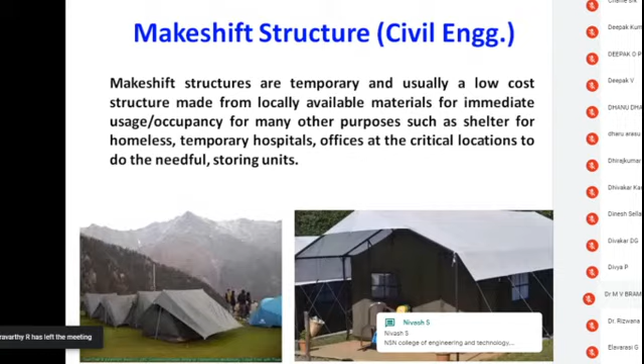So a makeshift structure is nothing but a small, economically viable structure, and it can be installed wherever you want in a very immediate manner. And it's not a laborious one, so there is no need for high technical expertise to implement those technologies. Each and every makeshift structure has its own sequence of opening, sequence of folding, sequence of collapse, etc.

Okay, so we have to follow those instructions to erect the makeshift structures wherever we need. Basically, in this image, you can see there are two structures existing. The first one is a normal tent. The second one is also a normal tent.

But the difference is the second one is engineered, where we have steel frames, and then it is entirely covered using any sheets. If you want to have a tarpaulin, you can use it, or if you want to use some plastic sheet or PVC coated sheet, you can use anything. It's up to our feasibility and availability.

In the makeshift structure, we have to ensure one thing, that the material which we are going to use to make the structure should be available locally. The reason is, suppose I'm residing in the Himalayan area, if I want to make a makeshift structure at a particular point of hill stations, the material should be easily transportable. That's very, very important.

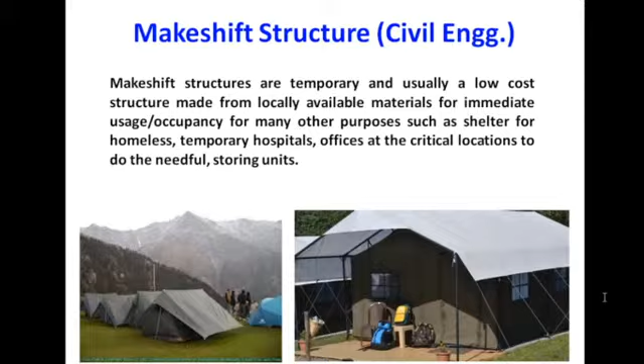So it should be transportable, light in weight, durable, and available locally, so that I can procure it in a large amount instead of importing from some other districts or states, because now crossing a district border itself is very difficult. In such circumstances, bringing material from other districts is very difficult to procure. So instead, if I have materials in my own district and my own town, it will be very easy for us to install things.

So makeshift means I am able to fabricate a structure at a particular point. After its requirement is fulfilled, I can move it to some other place or to my storing unit. Whenever it's required, I can take it back and install it at the place where it is exactly required. That's the exact meaning of makeshift structures.

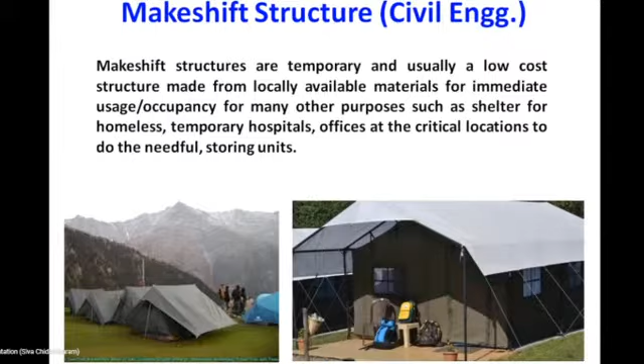Prefabricated structures are one of its kind, I can say. For example, in 1999 in Turkey there was an earthquake, and many structures completely collapsed, including prefabricated structures, and we lost a lot of lives. Post-earthquake studies say a lot of industrial structures constructed using precast and prefabricated units failed. But the very big thing is, immediately after the earthquake, they made temporary shelters using prefabricated units.

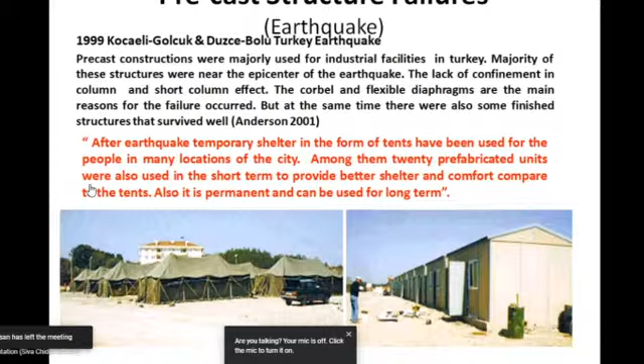So up to that time span, say 1 year or 2 years, I have to accommodate those people who lived in wonderful structures. Due to earthquakes, they have lost their buildings and become homeless. Accommodating them in a tent for 10 days, 2 weeks or a month is fine. But for 1 or 2 years, I need a structure which is not permanent but semi-permanent, and gives them perfect comfort. So the second image shows prefabricated structures, even though the earthquake showed prefabricated structures failed.

Some of them will survive also. But again, we have to go for these kinds of options because we don't have alternate options to make a structure in the fastest way.

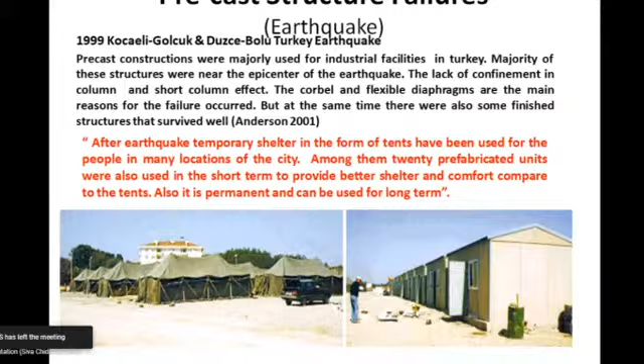So the importance of a makeshift structure is it should be lightweight, easy to assemble, transportable, economical, and durable for multiple purposes, because now we have very critical situations. We are going to install a lot of structures, and after certain months, if our problem is solved, we are not going to use them. So they will be stored in a storage unit. Whenever required, we will take the structures out and install them.

The material I use to fabricate these structures should be durable for multiple uses.

Next is feasible connection mechanism. In makeshift structures, connections play an important role in connecting two elements and transferring force between them. These connection mechanisms should be feasible, otherwise if anything happens while transporting or at the time of installation, if I face difficulty installing the structure, I have to immediately replace the impaired point, or repair it using locally available material. So mechanisms should be easily available and feasible. That's another point, and erection should not take too much time.

If my erection takes too much time, I can't make the structure rapidly and can't accommodate people in time. People means not only adults, but children or elderly persons. We can't keep them under hot sun, humid climate, or winter climate. So we have to accommodate them rapidly, no time delay. My fabrication and erection methodology should be very easy so it saves a lot of time.

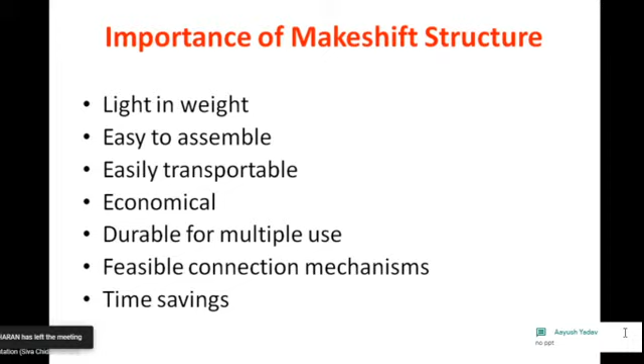So let me start with a small idea: a temporary shelter using PVC pipes and joints. We know PVC pipes don't require engineered persons to erect this kind of structure. PVC pipes are a very durable material, especially the electrical PVC pipes. We also have PVC pipes for pipelines, especially underwater pipelines, which is very tough material. So you can see tough pipes can be used for fabricating a structure.

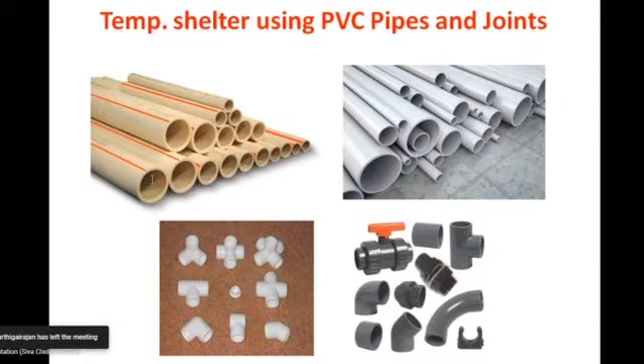Now, I need a temporary structure to accommodate, for example, 10 to 15 persons. So immediately I can make a shelter using PVC pipes, which are generally available everywhere, along with connecting elbows. Just connect them to make a shell, then cover it using any sheets or tarpaulin sheets. If you're running out of sheets, you can use normal fabrics, or normal sheets if it's not rainy season.

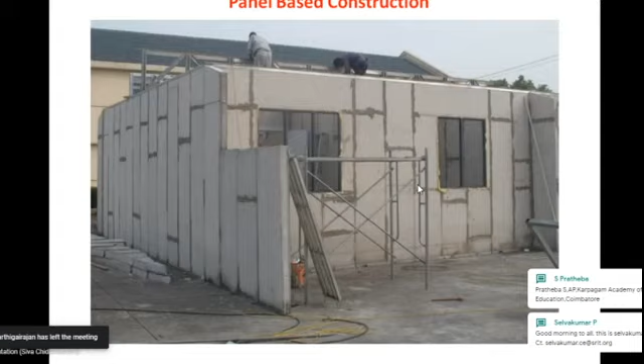These kind of wall panels are easily available in many locations, and they come with connecting mechanisms. It's not a simple wall panel, it's a wall panel having many connection mechanisms. Among them, one is very famous.

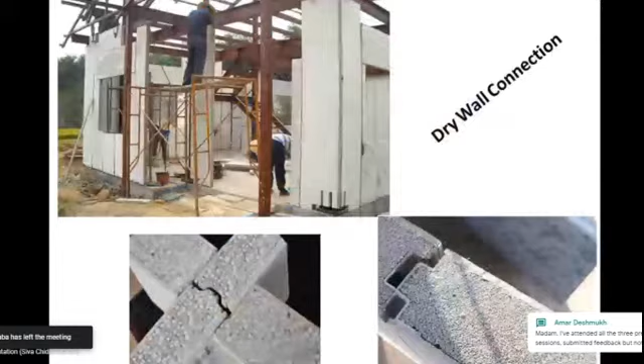Let me show this one, it's called tongue and groove. Here you have to insert a groove like this. After fixing it, you can grout it completely using grouting materials made of polymer based, epoxy based, or cement based materials. Now after grouting it, it will become like this.

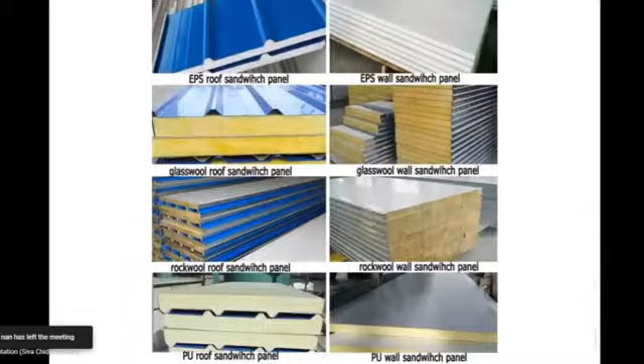If you want to introduce a window, you can introduce it. If you want to introduce a door, you can introduce it. So it is very easy to install. In a daytime you can install the structure. To get a completed structure we may need a week maximum, 2-3 days maybe we can easily complete the entire structure.

And these wall panels can not only be used for a single story, they can be used for multi-story buildings also. If you have an external moment resistance frame mechanism, then you can use these kind of wall panels for multi-storied structures also. Multi-storied structure - how can it be a temporary structure? There will be a question.

So just imagine we have steel sections in and around the disaster-prone zone. I can bring the steel frames, I can design and make a G+1 or G+2, and immediately it can be erected using welding and bolting technologies, so it is quite rapid. In such a circumstance, instead of going for conventional material for infill, I can use these kind of materials.

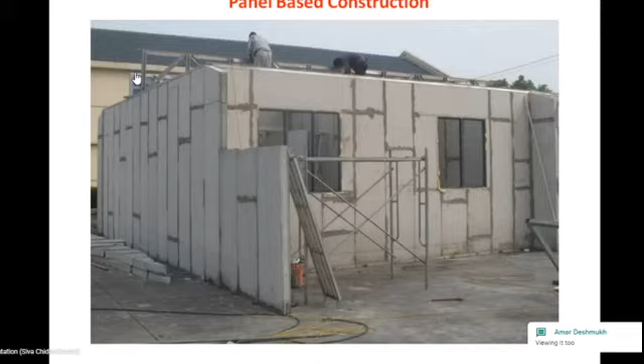Now you can see this is one of the wonderful structures made from lightweight panel-based construction. Lightweight panel-based means it's similar to the panel I discussed in the former slide. This is made from polyurethane foam as a core material. The core material will always have polyurethane foam, EPS, or foam concrete, anything.

It's less dense, so it will be easy to transport. Because if I'm using a truck or lorry, I can transport the material for the entire building. If I can transport material for the entire building construction using a single truck, that will save a lot of time for me, and I can make it very fast.

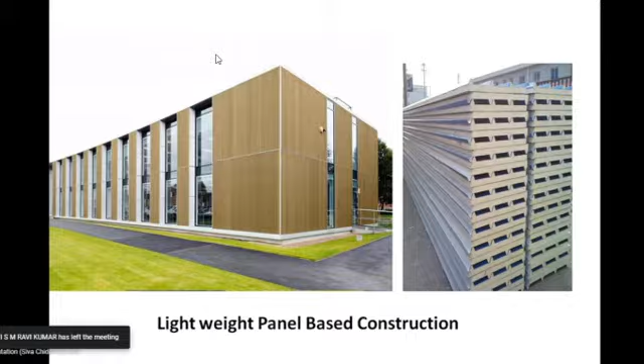Now you can see this is a different type of wall panel, made using EPS, PU foams, glass wool, and foamed concrete. Externally and internally, it will be covered with durable materials such as corrugated sheets and plywood boards, cement plaster boards, or fiber boards, etc.

Reason for corrugated means corrugation will give additional stiffness to your wall panel instead of a plain sheet. So generally, when they use corrugated sheets, the external surface will have corrugated portions and the internal surface will be smooth, because internally inside the building we don't want to see corrugated portions as it doesn't give much aesthetic value. That's why they use plain surface inside the panel structures, whereas the external portions have corrugation, which gives a wonderful amount of stiffness.

Now you can see this is a kind of framed structure they are making, and they are using infills as wall panel materials. This way construction happens in a very rapid manner. Otherwise it would take too much time if we use locally available conventional materials like brick, cement, concrete, etc.

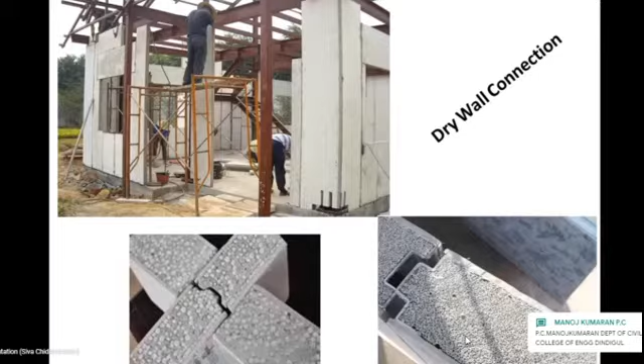Next is collapsible structures. Collapsible means we are trying to save space - that's our main purpose. For example, in this image I've shown two chairs. This is called a foldable chair, which means after the need is complete, we can fold the chair and store it somewhere, so it won't take up large space. If we are running out of space in our house, we use this kind of foldable chair so that after its purpose is complete, we can fold it and keep it somewhere to utilize the existing space.

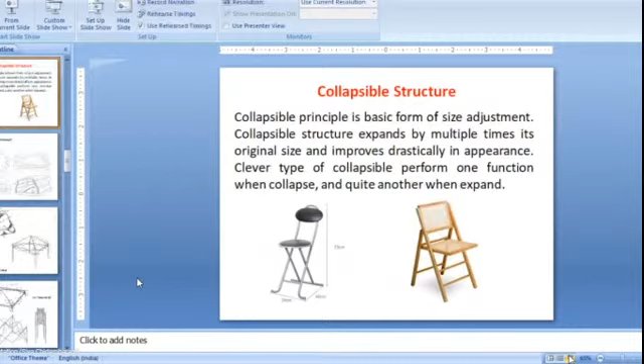The same phenomena we are going to use to make structures out of it, so that I can utilize many of this kind of ideas to make structures.

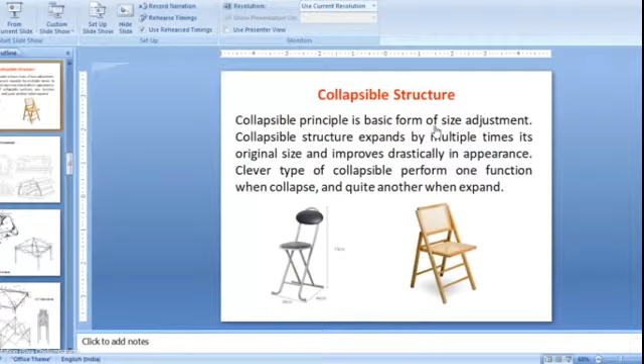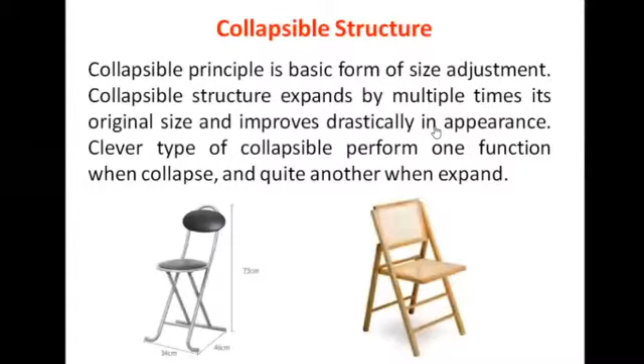Now there are many types of collapsible structures we have. Many inventions have been made to create collapsible structures using different types of materials. That's why before entering into a temporary shelter, we should know about different types of materials available at sites. So let us go through some collapsible mechanisms.

Now you can see here, the first image shows the elevation of a structure. But wherever you see some cuts, they have used hinges. If you are seeing me, I'm showing you some hinge. These kinds of hinges can be used to make a structure foldable - simple hinges, and these hinges are generally available everywhere.

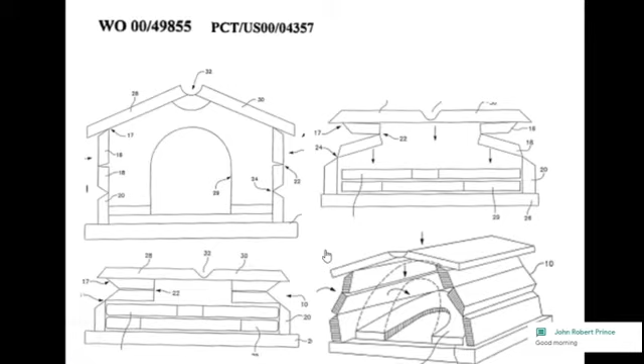So in the first image they have the elevation, and in the second image they have made a lot of cuts in the structure and used hinges at the cut points, so it can fold like this. The third image shows the structure completely folded. So a full-scale structure becomes very small, and it can be erected wherever you want. It is easily transportable because these structures are light in weight, and easily erectable, so anybody can do the erection.

If you want to transport material, it is very difficult to transport even some steel frames. But if I have small structures like this, we can easily transport them to a hilly region so that people can be accommodated in the structures.

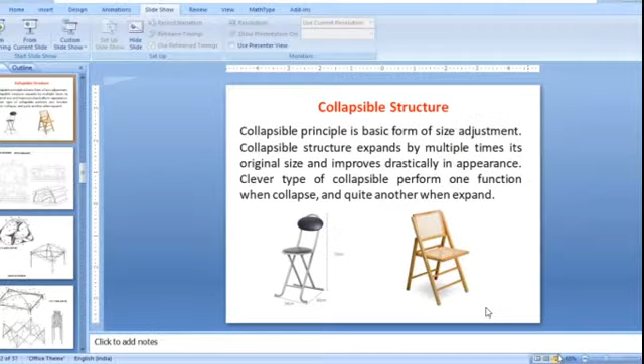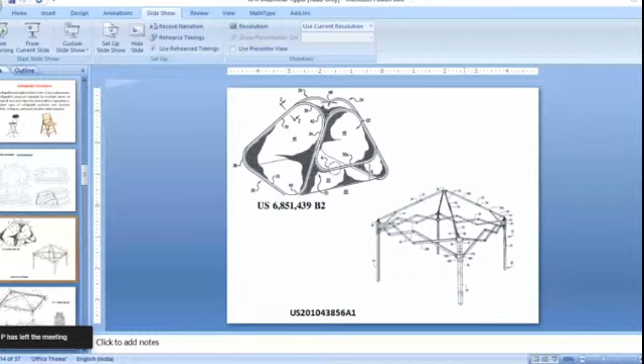If I collapse it, it becomes like this. If I open it, it becomes a square. If I further open it, I am able to elongate the length. And if I collapse it, it can extend in the vertical direction. So in vertical as well as horizontal direction, I am able to collapse it like this. This kind of mechanism is not new. It is a very old mechanism, and it can be effectively used in our civil structures to make them collapsible. So this is how they have made collapsible structures.

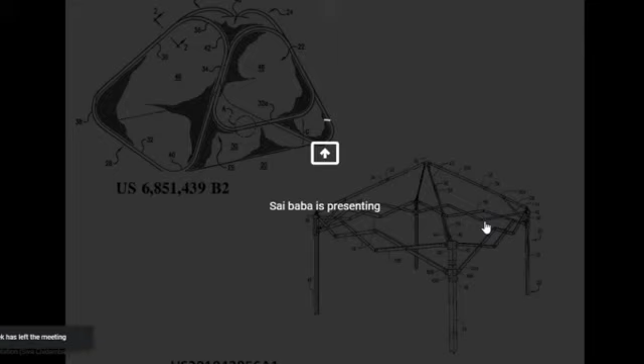So this kind of structure can be collapsed and converted. It looks like a very big structure, but if you collapse it, it becomes a 1 feet by 1 feet structure, so it can be easily transported. Generally, collapsible structures deal with only frame elements so they are easily transportable. They are not bothering about external covering. Covering can use any tarpaulin sheets, PVC sheets or plastic sheets, whatever is available. Those sheets also can be folded and transported in large quantity. That's the primary thing.

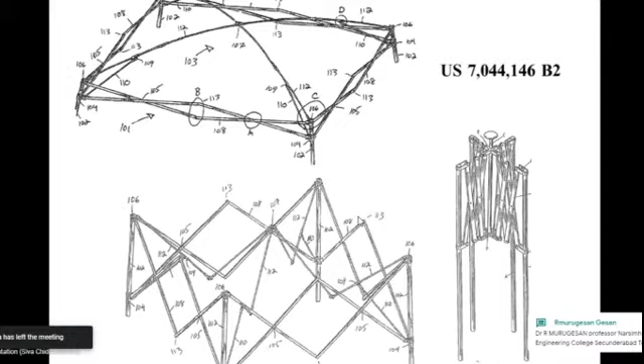So now this is a similar kind of thing I can show you. The first image shows the open structure, the second image shows how they are unfolding it, and the third one shows how after completely folding, the structure becomes a small element. So now it can be transported everywhere. With these transportable structures, in a single truck you can accommodate, say, 100 small units. If you can transport at least 50 units to a particular place using a single truck, it is a huge time saving and a huge cost saving for us. So we can provide immediate shelter to the people or to the needy.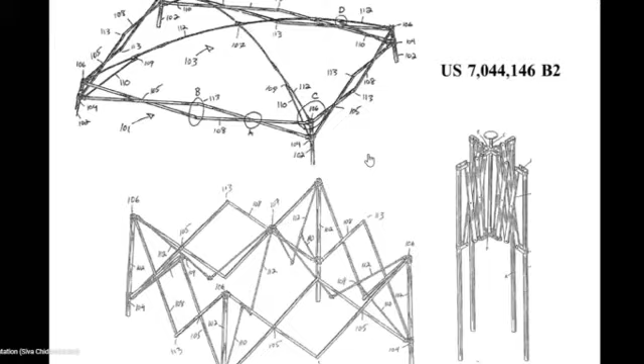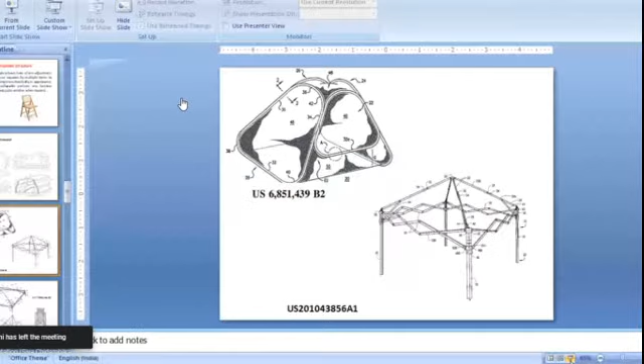So now this is one very famous invention. They are using shipment containers to make structures out of them. Before going into the presentation, I would like to show you some videos. These videos are already available on YouTube, so you can see those things. Let me show you.

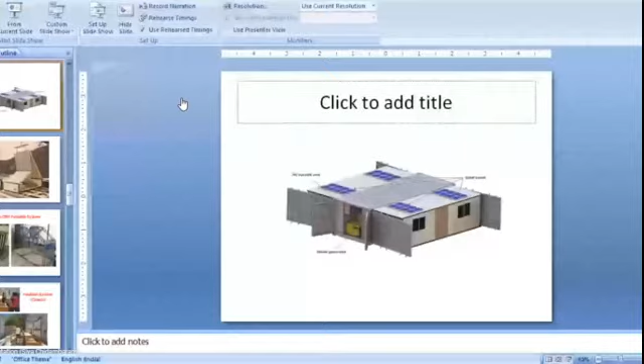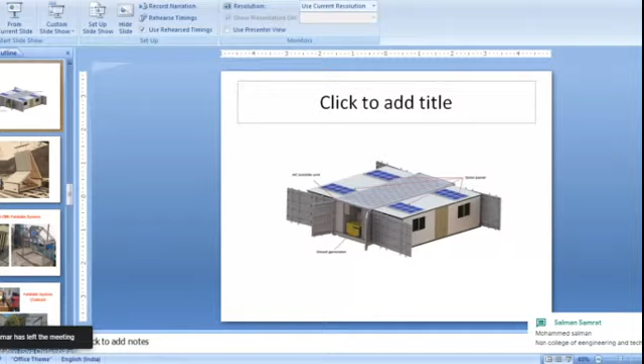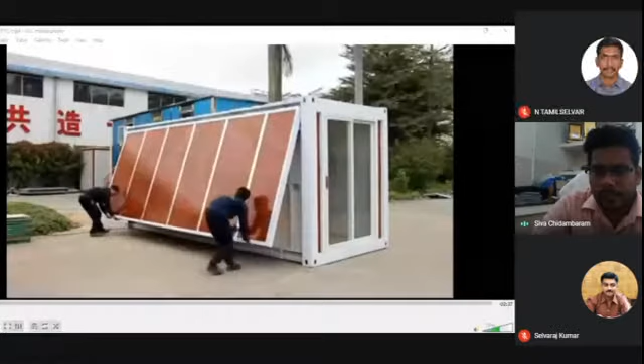Sir, I'm sorry to disturb you. This is Dr. Kanmani. There are actually some disturbances coming from your side, sir. Somebody is, I think, chatting. From my side? Yes, sir. All other participants are on mute. Okay, I will try to rectify that. Your audio is not clear because of that. Thank you, sir. Okay, sure. Can you see this video now? No, sir. Yeah, now it's showing. Yes, sir, it is visible. Okay.

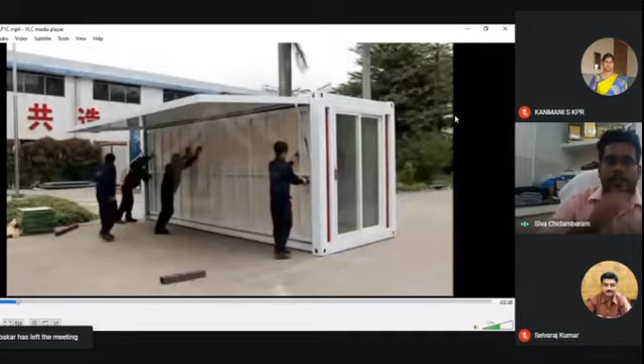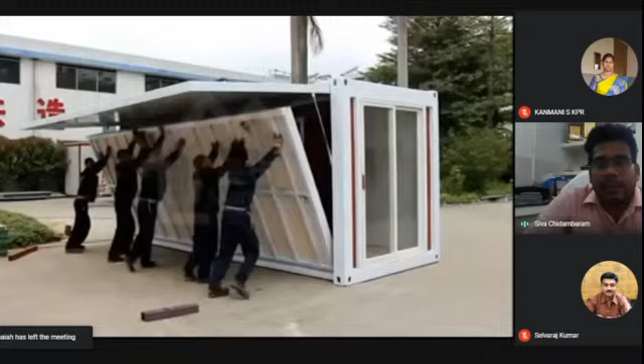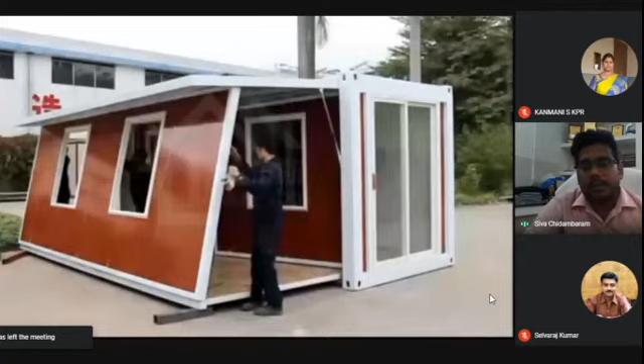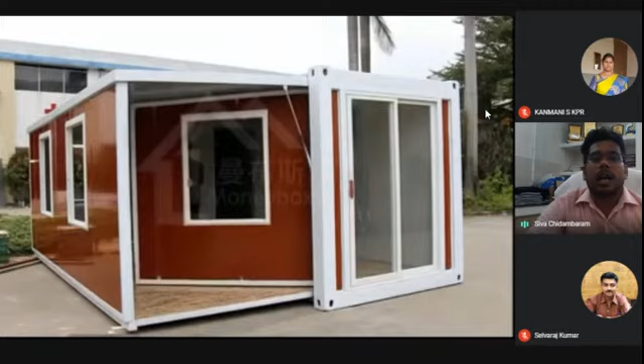So the main container structure is the main unit that will take all the forces. The remaining foldable and unfoldable units are connected with the main container structure. The container is the main solid unit, and they have installed a lot of extendable units made from lightweight materials. Now you can see how they are installing. They don't need any frames, cranes, equipment or instruments to install these structures. It is very easy to install. The main body is made from a container, the extendable units are attached to it, and it can be easily erected.

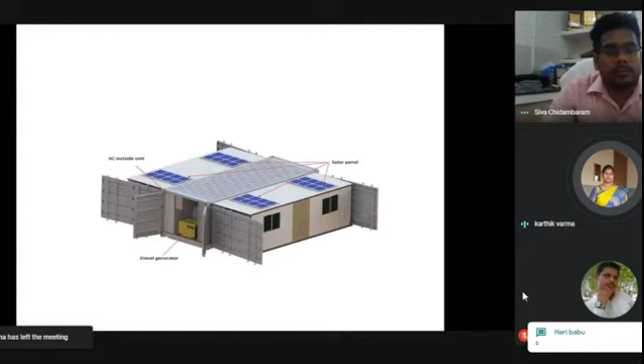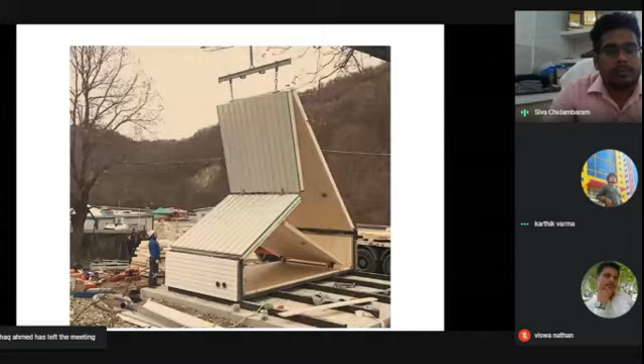Am I audible? Can you hear me? Yes, sir. Yes, sir. Okay.

So those kind of container structures, but these container structures are very stable and will give you wonderful comfort. And you should know a lot of folding mechanisms. Folding mechanism is a must. Foldable steps, foldable beds. You can see a lot of folding mechanisms in internet sources, how we have to utilize the existing space, and how it can be used in a wide way.

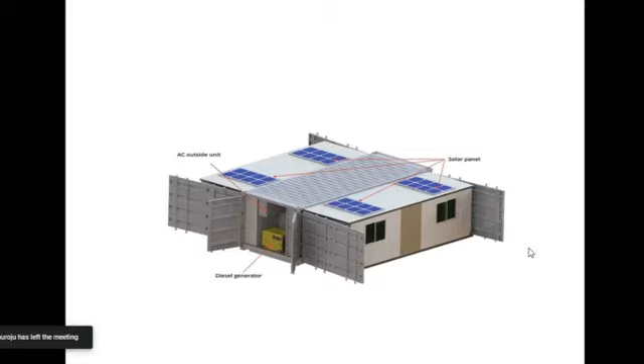For example, a small container can be extendable to a large space building. These kinds of buildings can be used for hospital purposes, and they give you wonderful comfort, in which you can use an air conditioner, whatever you want. This is like your normal house, but it is lightweight. The main central body is made from a container, an expired shipping container. Those containers can be remodeled like this and used for temporary shelters.

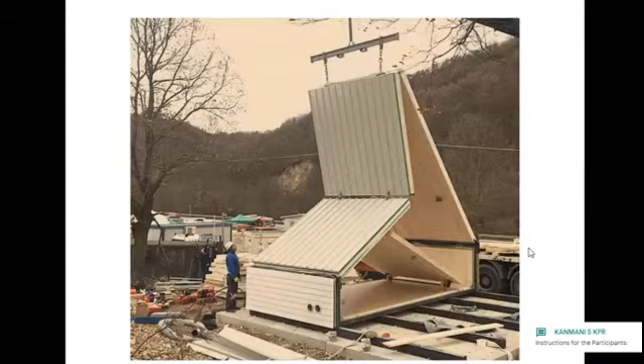Now, I have shown you some video of folding and unfolding. Folding and unfolding is a wonderful mechanism. You can fold and unfold any kind of building anywhere. The thing is, you need some additional instrumentation facilities like a crane or a jack system to fold and unfold the structures. If you have them, you can make n number of structures, because when you fold it, it becomes very small in shape.

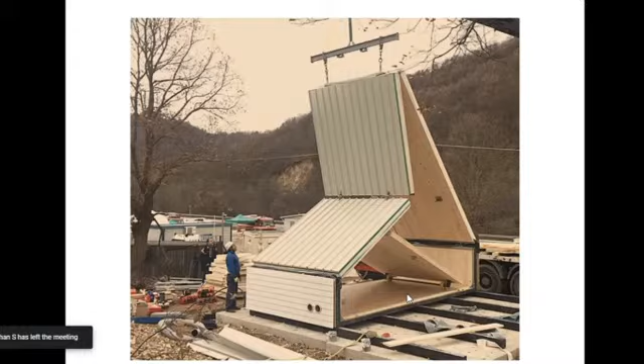I will show you another video later. When you open it, it becomes a house. So it is completely based on the need. If you want your structure with infill, you can make it. If you don't want infill, you can make only a shell structure and cover it with any locally existing material.

When you fold it, it becomes a 1.5 meter by 1.5 meter panel size, so it can be transported. In a single truck, you can transport nearly 20 to 40 huts, which are easily transportable and easily erectable. There is no need for a crane. You can simply open and install it.

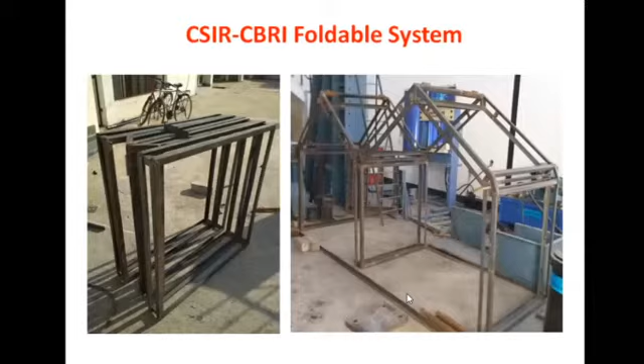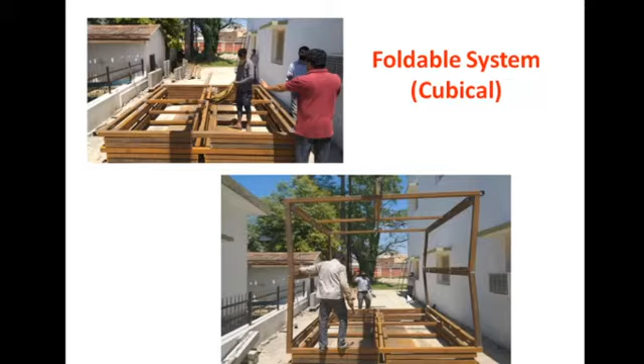Similarly, if you think you need a more comfortable building, you can make a structure like this. The first one is the folded unit, and when you unfold it, it becomes a cubical structure. These cubical structures can be filled with whatever infill you want. It can be locked using locking mechanisms, and then it becomes a very stable structure. So this is a small introduction to foldable and collapsible structures.

Now let us go into inflatable structures. Inflatable structures you would have seen in many cultural fests. Our children used to play in inflatable units, like toys made from huge air balloons, in which you can go and jump. Those structures used to be made like a castle or a ramp, and our children used to enjoy them. Those phenomena can be used to make inflatable structures.

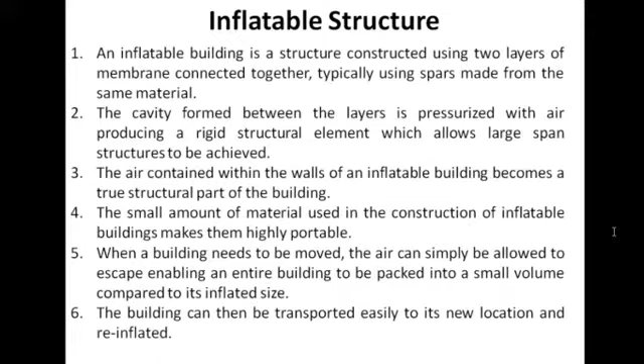An inflatable structure consists of two layers, an internal layer and an external layer, made from PVC-based or PVC-coated materials. When you remove the air, it can be folded into a small unit. If you fill air into the material, it becomes an inflatable structure like this.

So this is called an inflatable structure. There is no need for a flat surface anywhere. If you want to use it, you can use it. And the beauty is you can use the air conditioner, anything. So these kinds of inflatable units are very easy to transport. If you remove the air, it will become a very small unit.

It can be transported to any location where you can't bring huge, heavyweight materials, like a hilly area or a small island. If you want to transport huge material, it is very difficult to transport steel and wooden materials. Whereas these kinds of inflatable structures are transportable. This is a small introduction to inflatables.

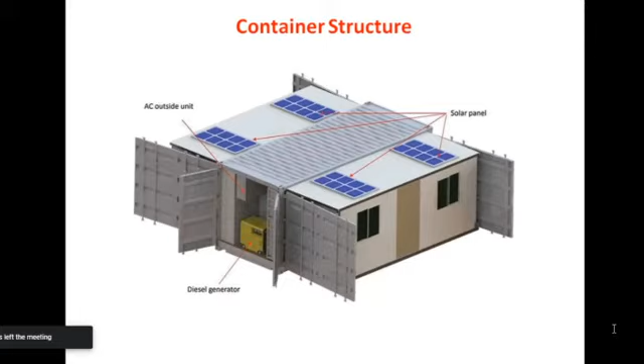Next is container structure. I have already discussed containers. Now, these kinds of containers can be used to make semi-permanent structures. You can see the same container has been used, and you can see a lot of structures made out of it. These are all semi-permanent structures because these are all expired containers. You can cut, you can make doors and windows. And the beauty of a container is it's a very stable, very rigid structure.

The external structure has been made using corrugated sheets. It's not like the normal corrugated sheets. It's a steel sheet in a corrugated form, so we can get a lot of stiffness out of it. So internally it will become very hot. So that is the primary problem we have. To address that particular issue, we have to use thermal comfort materials like PU foam or EPS foam.

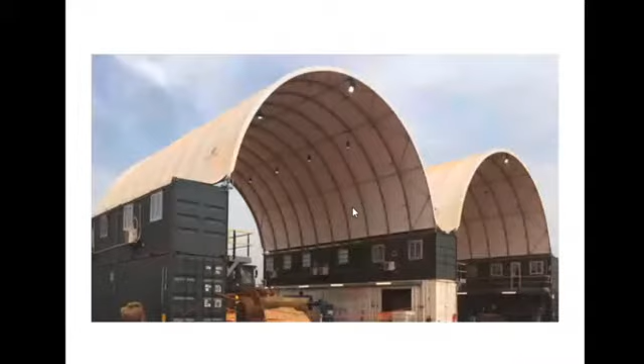So you can use those kinds of infill materials for the interior structure, for more thermal comfort, because it is made out of steel. So it will absorb a lot of heat and it will give you too much thermal discomfort. To avoid that, we have to use thermal comfort materials as infill materials. That's it. So these kinds of containers can be used to make a structure like this.

You can see here, the external roof frames have been made of aluminium. Again, it is a foldable unit. By using the containers, we can make these kinds of structures. Now we have trussless roofs also. That trussless roof will be made of corrugated sheets with a different type of corrugation. That will add certain stiffness, so we can eliminate the need for a truss. Those kinds of structures can be supported using our containers.

So now you can accommodate people in containers, as well as use this kind of covered area for storing any kind of units during any catastrophic problems, disasters, or pandemic situations.

Next one is German Hanger. German Hanger is a company name. They're using tents. It's a huge space tent. If you go to any international conference, or if your government is organizing an international science festival, you can see these kinds of structures, because we need a large area to showcase different types of inventions, scientific instruments and scientific experiments. We have to keep them in wonderful locations so that people can come and enjoy the experiments and the visually shown materials.

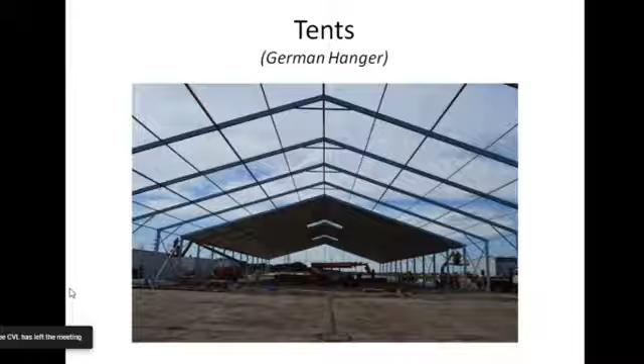And after completing this, we can use air conditioner. If you want, you can use air conditioner, and all these things can be used. Similar kind of tents we can make. So the bay width will be very large and the length will be very large. If you want to go for 10 meter, we can go for 10 meter width. 60 meter length also you can easily go for.

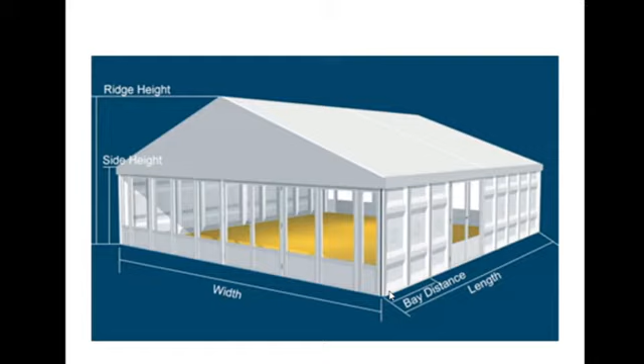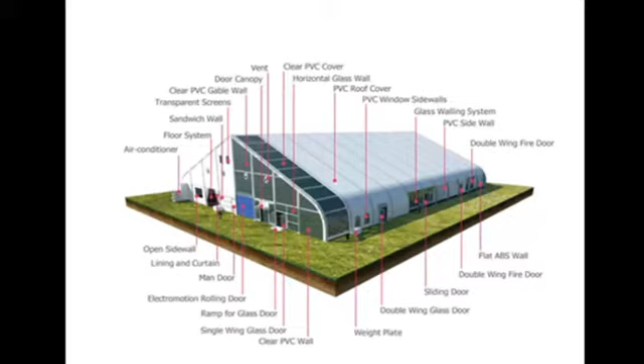Nowadays in many locations you can see this kind of tent kind of structures. This is like an industrial building, but it is a foldable unit, and after completing the main purpose, you can remove the skin materials, and the remaining frame materials can be folded. It can be transported in a truck. Simple. You can see a conference unit is completely made of this kind of tent structures, air conditioned.

Similar kind of tents, you can see the first image. It is like our grill doors, how we are opening and closing. Same pattern they are using. Now just imagine we have a grill door, and between two grills I have used some skins. The skin is foldable. If you want to really imagine this, currently we don't have it.

If you see an old bus from before the 1990s, the windows of old buses used to have folding units. These folding units will be locked at the topmost layer. Whenever rain comes, we can unfold it. The outer skin is made of some material which can resist the rain water, and internally they used to go for some steel plates. So it is foldable and it is durable also.

Same mechanism they can use. At the bottommost point they have a rail. The entire structure will be placed on the rail, and they will just pull the structure. After pulling the structure up to a certain distance, now your building is ready. Your temporary shelter is ready. This shelter can be used for any purposes as per your needs.

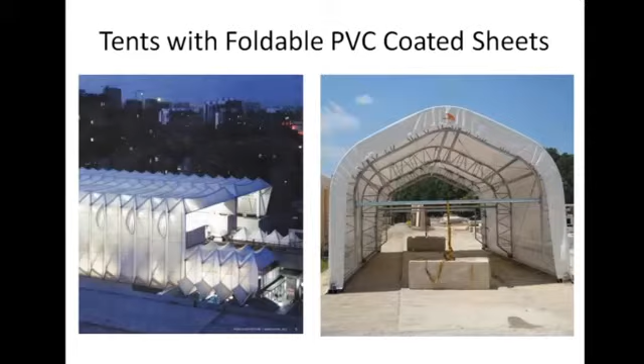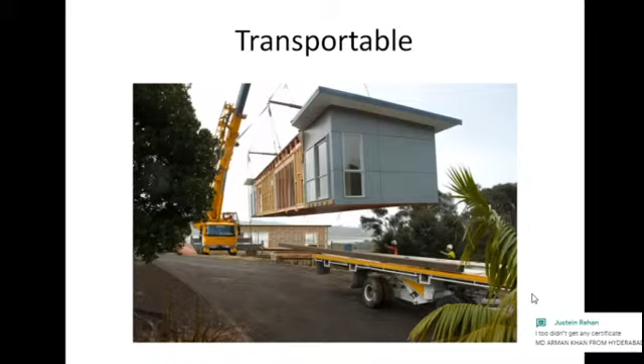Now, I have told you that these kinds of structures should be transportable. If you are making a structure using heavy weight, then we can't transport it. The material should be transportable, or otherwise the entire unit should be transportable using an available truck. So whenever you are thinking to do some research in this, always remember one thing: in India we have a limited size for a truck. Everything should be accommodatable within the truck, and accordingly we have to design and fabricate any units. So material should be lightweight.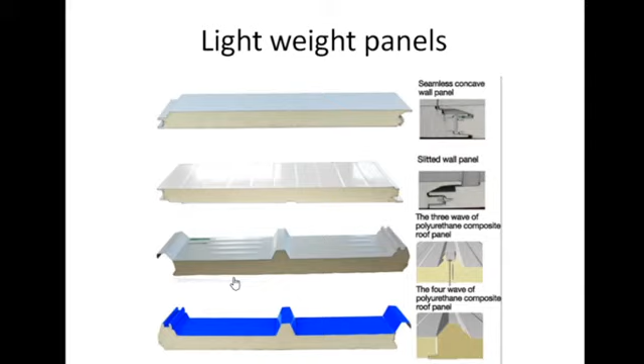You can see internally and externally they have a very rigid panel made from any materials. It will act as heat insulation. Internal materials are some thermal insulating materials made from foam, any materials which provide sound insulation and thermal insulation. So the external temperature and internal temperature may be different.

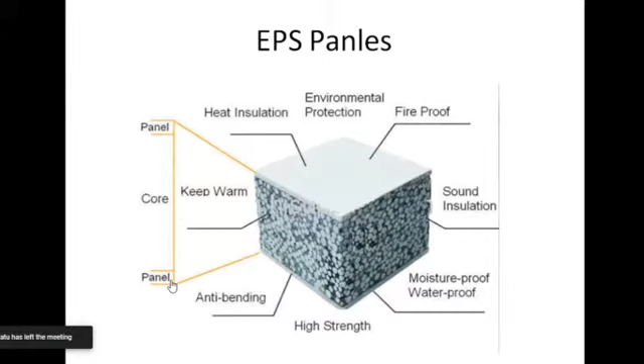Next one is polycarbonate sheets. Polycarbonate sheets are very famous nowadays. It's a very durable material, and now we can see many bridges have the external portion covered just as a protective measure. Instead of using steel sheet, they are using polycarbonate sheets because it is a durable and very tough material. These materials are light in weight, and generally have a cellular kind of structure for heat flow. So this will also provide thermal comfort up to a certain extent.

So these materials can also be used as a shell material for your temporary shelters, because it is lightweight, very cheap, and it can be transported in large quantities. It is especially very good for temporary structures. Nowadays we are using this kind of sheets for covering car parking and bike parking structures, because it is very cheap and foldable, and you can convert it into any arch kind of shapes also.

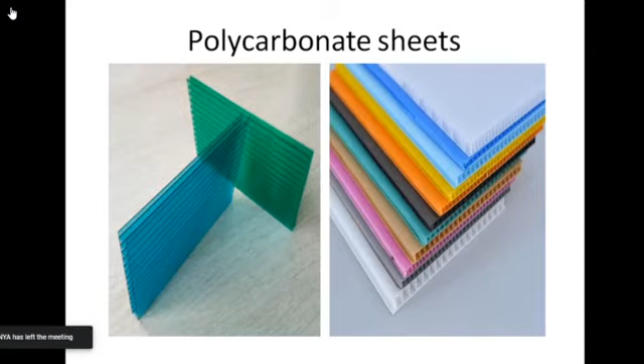So it is very easy for fabrication purposes. Instead of going for corrugated sheets, you can go for this also. And this is small air bubble insulation sheets. You would have seen these kinds of air bubbles for packing purposes. The same packing material can be used as a thermally insulating material also.

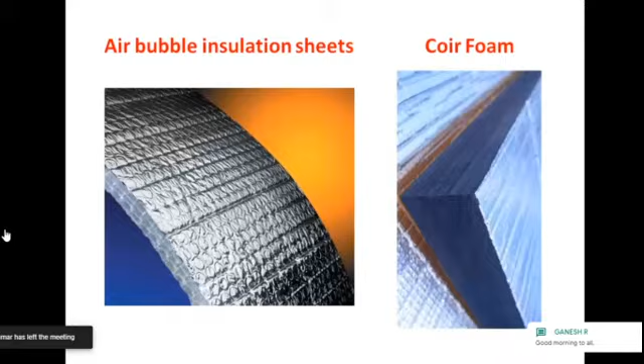Again, the second one is the coir foam. These kinds of foams we generally use for making low cost beds. If you are constructing a temporary hospital, we have to go for beds also. If you are spending too much per bed, it's very difficult for us, and for the governments also. So we can make use of this kind of foam to make beds as well as thermally insulating materials. These materials are generally available everywhere, so we can make use of them.

And the next one is the PVC wall panels. These wall panels come in thicknesses of 20 mm and 30 mm, and they have an internal vacuum space. The internal vacuum space means when the heat flows from the external atmosphere, the internal vacuum space will not transmit the heat, and when it comes to the internal surface, the temperature will be different. So this will again act as a thermal insulating material for us, and it is durable also. Even for the external covering we can use this. So my entire temporary shelter will become thermally comfortable and very light in weight also.

And the next one we are seeing is called PVC coated sheets. In tents we are using this kind of thing. It is very useful because it is a durable material. It can be rolled, it can be folded, etc. We can make use of this.

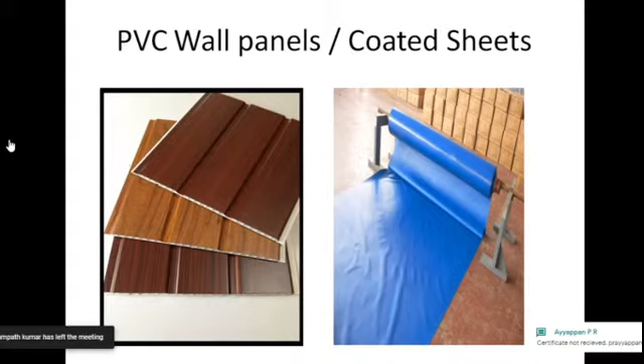So I think I have come to the conclusion. Before concluding this presentation, I would like to show you some small videos of how we are doing the unfolding and folding mechanisms. Let me show you. Can you see the video now?

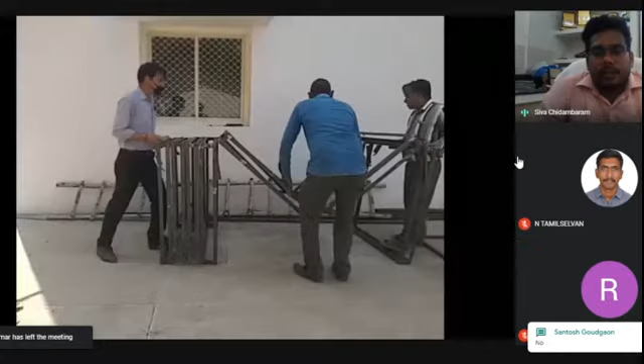You can see here, this is a complete unit we have made, and we are using just 3 persons' help to fold it and unfold it. Now they are unfolding the entire unit, so it is continuous, and you can see after opening it, we have to bolt it somewhere to make the structure more stable, and then it can be serially connected. N number of structures can be connected horizontally as well as vertically. You can see it's a continuous unit.

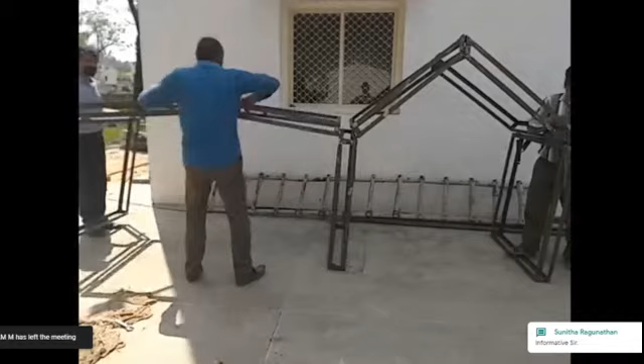We can make more units like this. Each and every unit can accommodate certain persons. It can be used as temporary as well as semi-permanent structures like this. You can see here, we have made 2 units out of a single foldable unit. So a single folded panel, when you open it, makes 2 structures. These two structures can accommodate at least 4 patients if used for a hospital, or for some other purpose. The size is 10 feet by 10 feet, so you can imagine 10 feet by 10 feet can be used for any other purposes.

Okay. So this is a small introduction about emerging trends in temporary structures. By this, I am concluding my presentation.